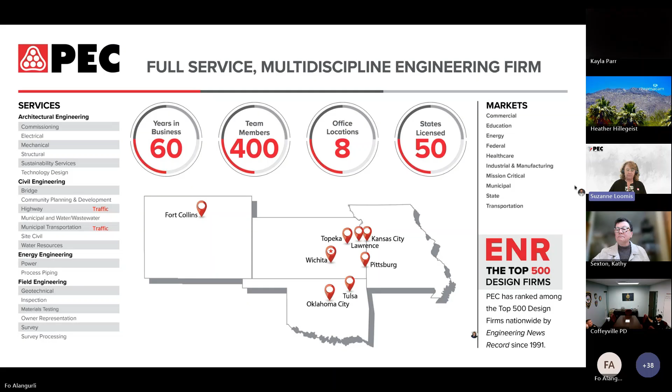Okay, thank you. We are going to be touching on just a few of the issues. We're just barely going to scrape the surface today, going through this MUTCD, and we want to make sure that you get a good flavor for what's happening with the changes, because there's an update every so often. And PEC is a multidiscipline firm, and we have offices in multiple states, and 2 of our specific groups, our highway group and our municipal transportation group, have traffic staff that are well versed in all of the traffic items that will come up in the MUTCD.

States have to update and have to accept and adopt the update to the MUTCD, and they are required to do that by January 18th of 2026. And PEC and GBA, both firms have been hired by the state of Kansas, by KDOT, and they are doing a lot of review of what the feds provided on the federal MUTCD.

And they are looking through everything, and both of these organizations provided a summary to KDOT about the updates. And this is pretty important because when you are somebody that deals with traffic control, you need to know what those changes are. There are oftentimes supplements to what the state approves as the state approved MUTCD. And when PEC and GBA look through all of the federal version, then they give a summary to KDOT and how this is going to impact things in the state.

And currently, we are on phase 2. There were a bunch of meetings. Everybody gets together and looks at what the summary was, and now they are updating KDOT standards so that they are in compliance with this new 11th edition of the MUTCD.

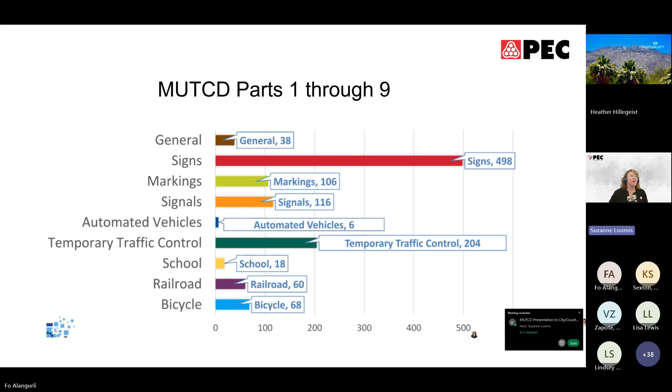There are 9 parts to the MUTCD, over 1,100 pages. And you'll notice here, these are the page numbers for each different part. And of course, when we're talking about traffic control, signs is going to have the most with 498 pages. And then temporary traffic control, which plays a huge part for anybody that is trying to make sure that the traffic control is appropriate on a roadway throughout the state and the nation.

And then the last thing that I would point out to you as a general comment, the purpose of the MUTCD is pretty specific. It is a law. There are a bunch of things that it is specific about and there are things that it is not about. So it's the law, it's the national standard, it gives technical guidance, but it is not geometric design. They are not telling you how to provide geometric design, to give countermeasures and provide strategy.

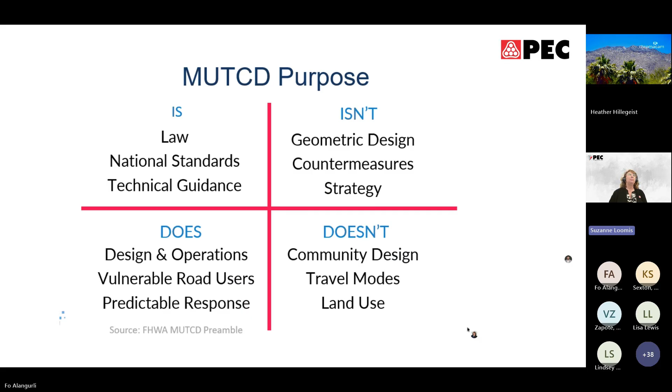You have to remember this is a document that you're going to look at to determine, hey, do I have this right? But not how to do design work specifically.

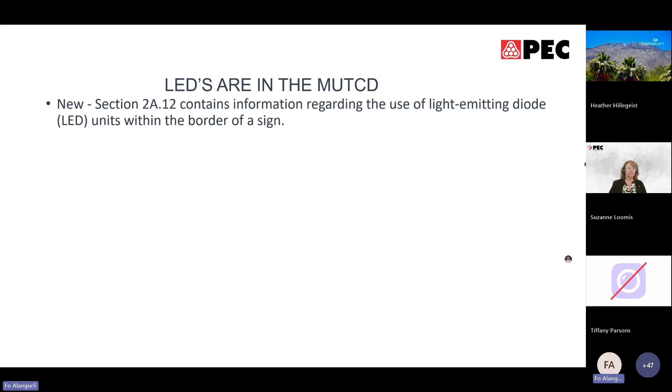So LEDs are in the MUTCD. This is something new. It was not in the older one. So there's a new section containing information regarding the use of LEDs within the border of a sign. Here's the change. The new standard: where LED units are used, the sign shall otherwise comply with the requirements for retroreflection and illumination for nighttime viewing.

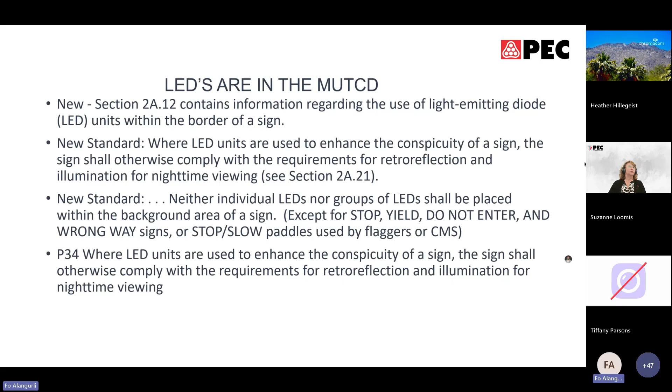And neither individual LEDs nor groups of LEDs shall be placed within the background area of a sign, except for stop, yield, do not enter, and wrong way signs. Those are the only ones that are allowed to have LEDs within the background area of the sign. And where LEDs are used, obviously the sign still shall comply with the requirements for retroreflection. So this is acceptable.

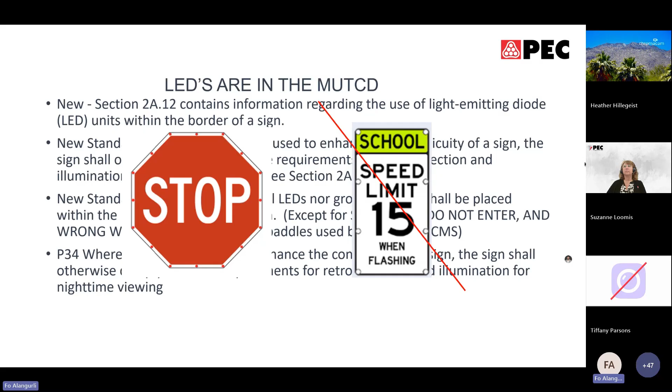This is not acceptable anymore. This is going to be a big change for quite a few cities because this was approved before, or not necessarily approved, but there wasn't anything that says you cannot do it. And now they're coming back and saying you cannot do it. So if you have any school speed limit locations with activation lights, you have to have the lights above it, and they cannot be within the border of the signs.

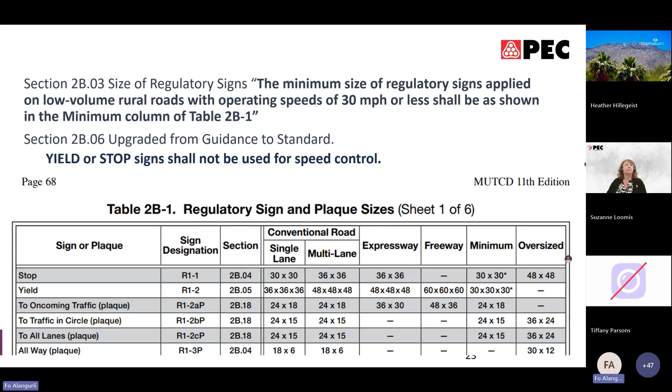At intersections where all approaches are controlled by stop signs, an all-way supplemental plaque must be mounted below each stop sign. Supplemental plaques with numbers of ways, so a two-way, a three-way, are not permitted. This is not new from the old MUTCD, but we definitely wanted to bring it up as a good reminder. So you cannot have two-way, three-way, four-way stop sign plaques anymore. It's either all-way or no plaques at all.

And yeah. I would also mention, think about whenever you have a signal that's down and then staff maybe bring out temporary stop signs and it creates a four-way stop. This applies to those temporary signs as well. So that's something to remind your staff about.

There is new guidance for all-way stop control. Section 2B-12 provides new guidance for establishing all-way stop control. Decisions should be based on an engineering study that analyzes crash experience, sight distance, volume, transitions, and other relevant factors. So this section covers a new engineering study and warrants that have to be met in order to convert your two-way stop or three-way stop to an all-way control.

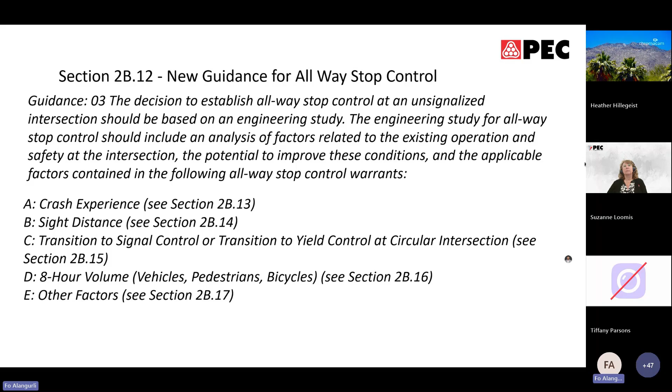2B.20, this is regarding in-street and overhead pedestrian and trail crossings. The stop for legend may only be used in states where law requires drivers to stop for pedestrians or bicyclists in a crosswalk. So correct me if I'm wrong, Suzanne, Kansas is not a state that requires a stop for pedestrians, correct? Correct. Yeah, it's a yield state. So you cannot use the sign that says state law stop for pedestrians in crosswalks. If you prefer to use one of those signs, you can only use the yield one because Kansas is not a stop for pedestrian state.

And then if you have those, pedestrian crossing signs must supplement the W11-2 warning signs with the W16-7P plaques as well.

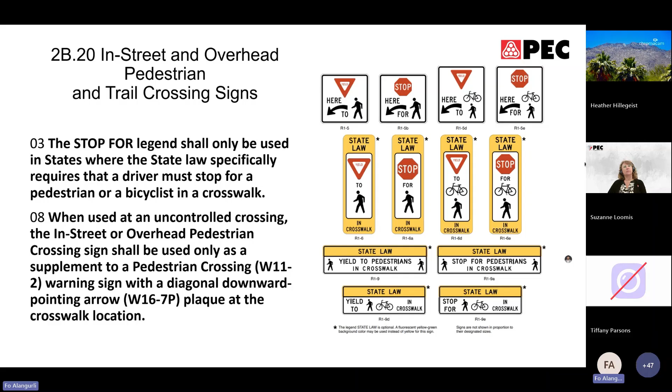Signs with roundabouts. We keep going back and forth on this. The chevron signs are going away again. They just brought it, and now they're going away. So now we have to go back to the one-way signs, and the plaque underneath it, the yellow plaque, is optional. This is frustrating for everybody because they just changed it, and now we're going back.

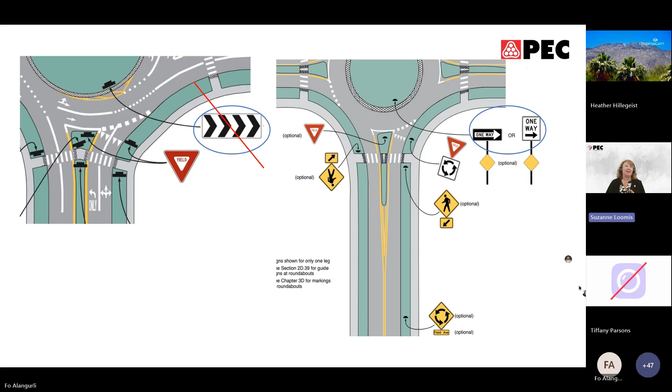Changeable message signs. Funny messages have to go. The FHWA said so. So agencies should avoid humorous, unconventional, or any messages, making sure that the information is being relayed to the driver.

All right. Part 3, markings. There is a new chapter regarding crosswalk markings. There are a few changes within the rest of the chapters, but they dedicated a whole new chapter for crosswalk markings. Section 3B.02, this one introduces warrants for yellow center lines. So there are new warrants for that. And also the no passing zones must be used on approaches to crosswalks.

There's new guidance that addresses the two-way left turn lane markings. So now anywhere that you have two-way left turn lane markings, you have to end it prior to an intersection and provide a left turn lane or bay for that left turn movement.

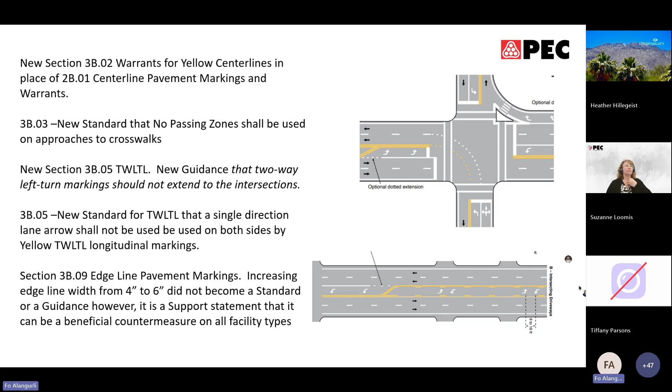And then there's also a new one for the edge line widths. Increasing edge line width from 4-inch to 6-inch did not become a standard or a guidance. This was a discussion that we were going to go to 6-inch. That did not pass. However, it is a support statement that it can be a beneficial countermeasure on all facility types. Okay.

Section 3B.07 requires normal width dotted white line markings to separate through lanes from adjacent deceleration or acceleration lanes. On major highways, it's a standard for KDOT, but the question everybody's asking MUTCD or the feds right now is, do we need it? Because the language does not say you need it at turn lanes, but the graphic is showing it. So people are asking that, and there is no answer for this right now. And we're telling everybody to keep it as is, the way that you're doing things, unless you have highways.

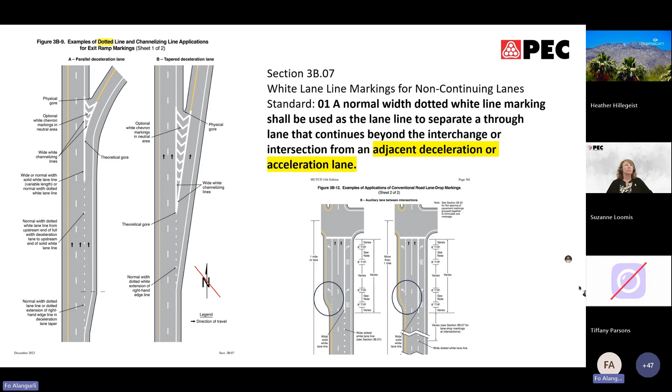Yield control intersections. New standards clarify that yield lines should not be used where drivers are required to stop, including at school and trail crossings. If a yield line is used, a yield sign must be present, and options for bicycle facilities are also included for any locations where you have bicycle facilities.

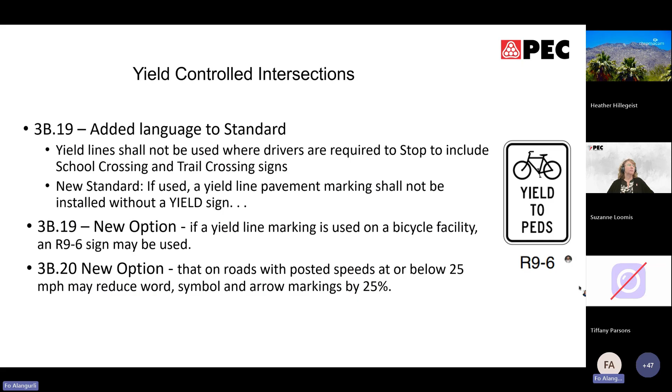There is a new option on roads with posted speeds at or below 25 miles per hour. You may reduce the word, symbol, and arrow markings by 25%.

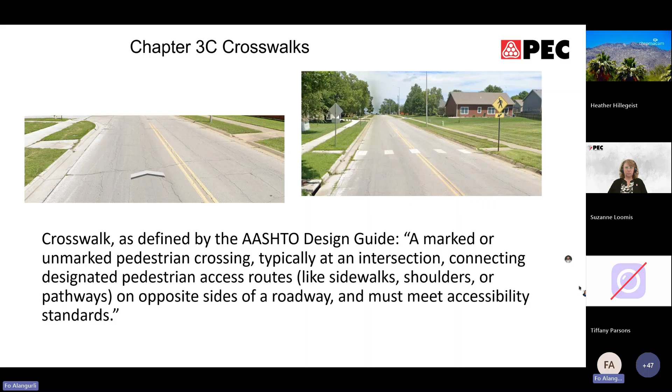Crosswalks, chapter 3C. This is the new chapter, and they have defined what a crosswalk is, and I'm just going to read it real quick. A marked or an unmarked pedestrian crossing, typically at an intersection, connecting designated pedestrian access routes like sidewalk, shoulders, pathway on opposite sides of a roadway, and must meet accessibility standards. They wanted to make sure that has been established for the definition for a crosswalk.

Fo, I might jump in. There's been a question, and I think this will apply as we're talking through other new items. A question about, on the existing roundabouts where you have chevrons, are you required to change those out right now? The answer to that is no, not right now. But if you make a change to anything, if say a sign was hit by somebody, you need to change it at that time as you're doing maintenance.

And this applies on the crosswalks and things, because pavement markings you're typically updating every year. So when you put your new down, you need to put down the new MUTCD standard. And when you change out signs, you need to change them out with new. If there's an accident at that location, then when you put up new, you ought to put up the new MUTCD requirements. Yep.

Crosswalks and traffic signals. There's new guidance that recommends installing crosswalk markings at locations controlled by traffic signals. The engineering judgment statement is now an option for omitting crosswalks. Also, the minimum width for marked crosswalks is 6 feet, and 8 feet for non-intersection crosswalks, so any mid-block crosswalks with speed limits of 40 miles per hour or greater.

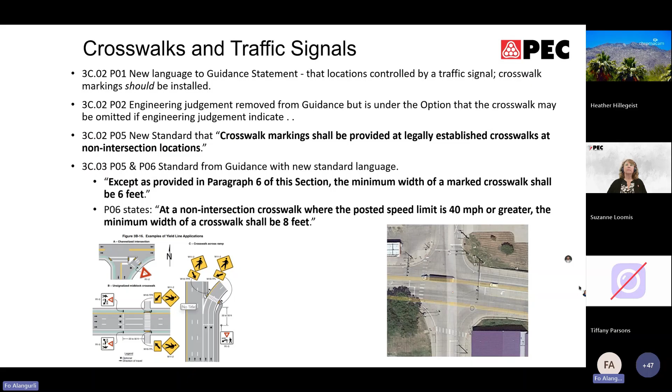More crosswalks. There are new standards requiring curb ramps to be within the extension of crosswalk markings, which typically everybody does, but they wanted to make sure that's included. High visibility crosswalk pavement markings are to be used at mid-block crossings. Transverse pavement markings cannot be used at mid-block crossings. You can only use them at stop-controlled or signalized intersections.

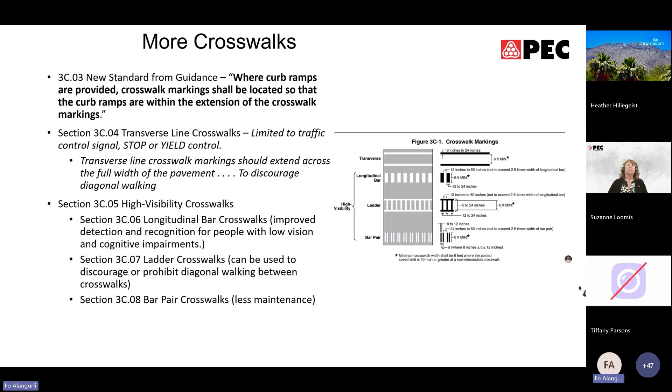Section 3H.06 limits the green colored pavement to specific bicycle facilities, such as bike lanes, extensions through intersections, two-stage turn boxes, and as a background for bicycle detector symbols.

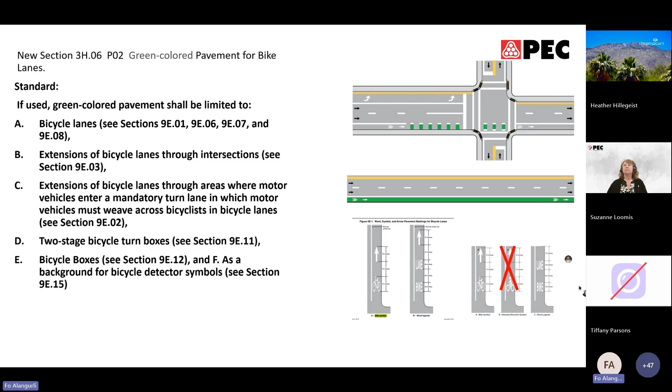They also have removed the helmeted bicyclist pavement marking symbol that was in the previous one. So now you can only use either the bike lane with an arrow or the bicycle with an arrow. So that's a big change. I know in Lawrence, they use the helmeted one everywhere, and now on any new project they have to use the new symbols.

Part 4, highway traffic signals. All right. Signal warrants are now guidance rather than standards. This change is because they wanted engineering judgment to be used in conjunction with the warrants to determine the need for traffic signals. It benefits quite a few locations that do not meet all the warrants for a signal, yet it is beneficial to install a signal. So now they're adding the engineering judgment side to be able to install those signals.

And then review the new standards in Chapter 4C for details. Chapter 4C has all the details regarding that.

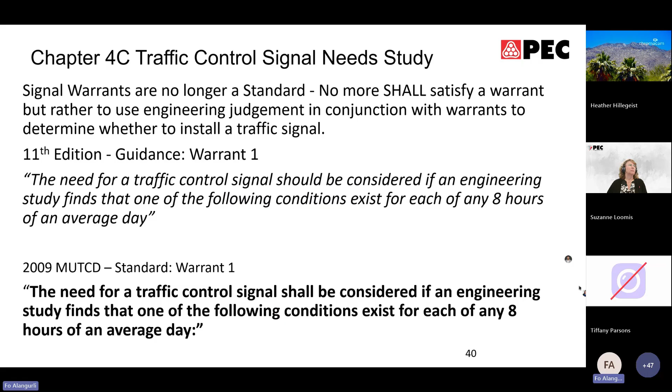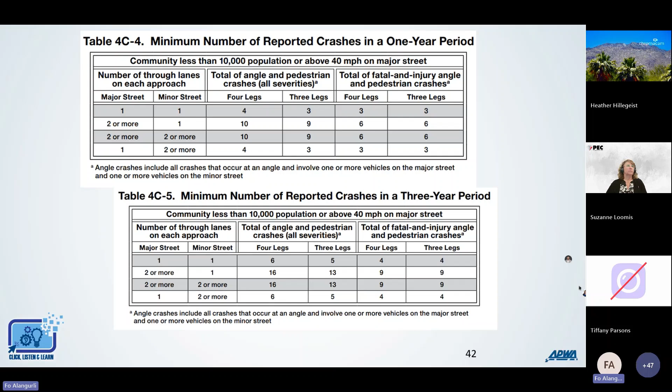All right, warrant 7. This warrant 7, for crash experience, now includes 4 new tables. They also added language that agencies can calibrate the Highway Safety Manual safety performance functions to their own crash data, improving the local relevance. But there are 4 new tables for the minimum crashes for warrant 7, and those tables are 4C-2 through 4C-5.

All right. Chapter 4D, section 4D.01, introduces new guidance for covering traffic signal faces with the yellow retroreflective strips. If the cover is placed, it should cover the entire signal face and the back plate. You cannot only cover the signal heads. So the whole signal head has to be covered.

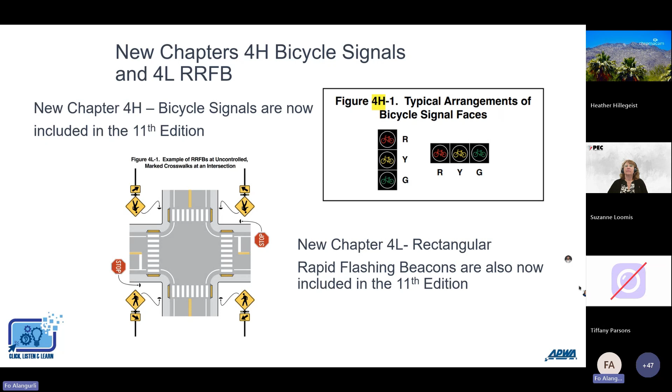New chapter 4H, bicycle signals, and 4L regarding the RRFB. So these chapters address the bicycle signals and the rectangular rapid flashing beacons. These devices are now included in the MUTCD because they're becoming a lot more popular. So they included them in the MUTCD, and there are some graphics in those chapters as well.

There is a new section regarding bicycle push buttons. It sets the standards for bicycle push buttons. They must meet the accessibility requirements and be accompanied by appropriate signs explaining their purpose and operation. And there are new signs regarding bicycle facilities too.

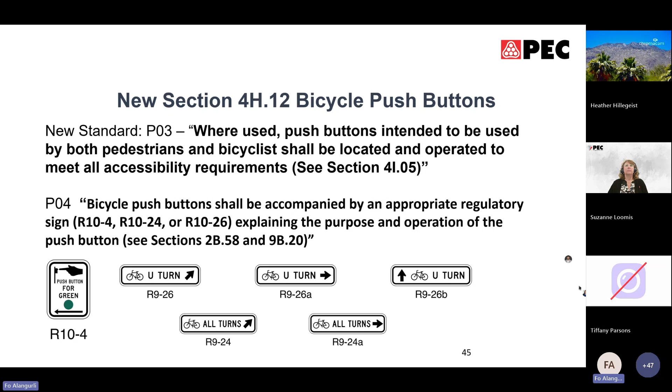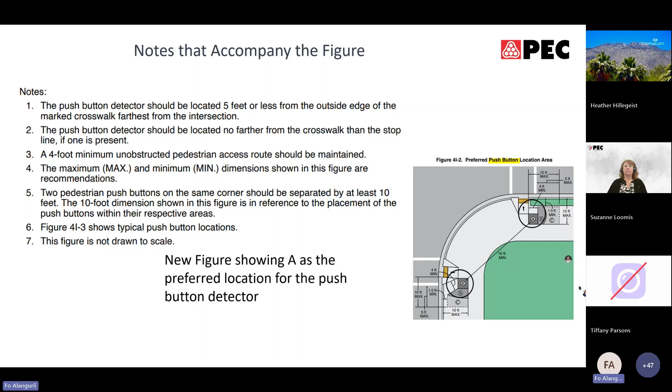There are new figures showing the preferred location for the push button detectors, and there are notes. So I'm not going to go into details, but this new section covers it. It's in section 4I. It covers all the new standards for where to place the push buttons for bicycles and pedestrians as well.

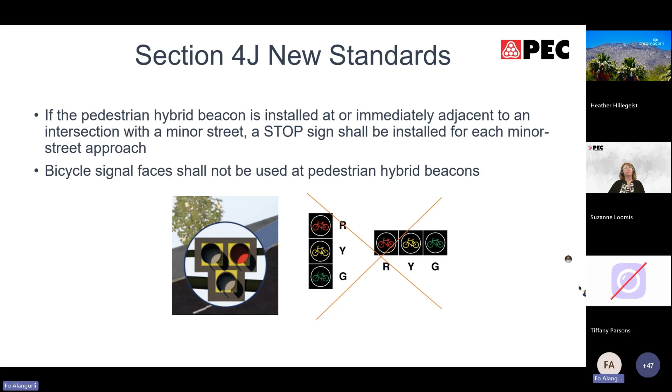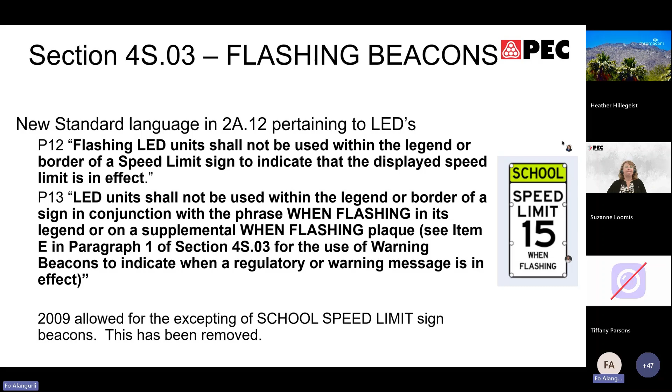Section 4S.03 introduces new standards for flashing LED units. As we talked about, they cannot be used within the legend or border of a speed limit sign. And the previous exception for school speed limit sign beacons, which existed in the 2009 edition, has been removed. With that, I'll turn it over to Suzanne for Part 5.

Okay, Part 5 is about traffic control devices for automated vehicles. The key here is that this is not a required section, but it's going to give you some guidance. And this is especially important if you want these automated vehicles to operate well in your community and you have them in your community. Probably all of us have a vehicle that is utilizing some type of guidance. I'll let you read through these later.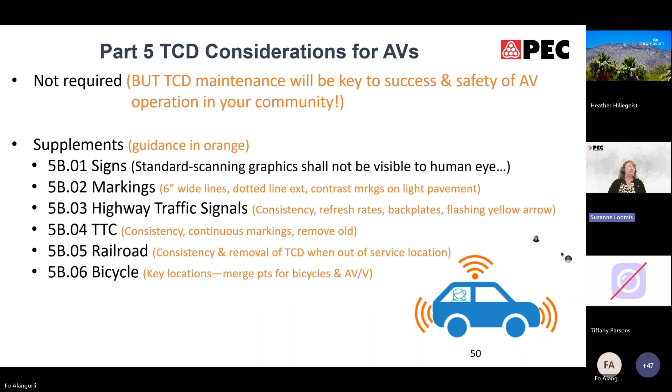We want to pick up the pace here. They tried to put down 6-inch wide lines, because these vehicles are following the traffic control, the pavement markings. So you want to make sure that they can see everything. They want to keep the driver safe. And the key to all of this is uniformity. Every part talks about uniformity of the markings, the signals, the traffic control. This takes us back to our college days, when they told us do not violate the driver's expectancy. So make everything uniform, and that's coming into play with all of these AVs.

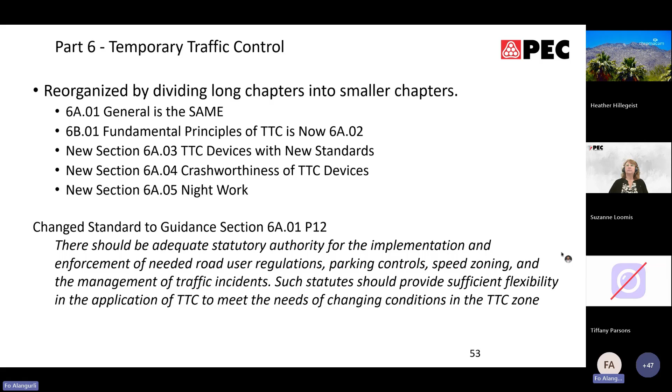All right, we'll jump into Part 6, temporary traffic control. This is a big one. There aren't a lot of changes, but a lot of new information has been added. The chapters have been divided for clarity, so there are new chapters. New standards address traffic control devices, crashworthiness, and night work. And guidance statements have been revised for ADA compliance.

Part 6, general. There's new language emphasizing providing information in usable formats for pedestrians with vision disabilities. Temporary traffic control devices are defined broadly, and sidewalk closure guidance has been revised for ADA compliance. This is a big one. You have to provide it during traffic control while you're closing those sidewalks.

You have to provide the vocal... I can't remember, what is it called, Suzanne? It's skipping me right now. Audible? The audible, yep, here we go. The audible information, the audible message devices on those sidewalk traffic control signs while you're closing those sidewalks, you have to provide that. This is a big one, I believe. There's been talk about it, so this is a big change. Make sure that you're aware of it, and that is section 6A.

Guidance now limits flag use to emergencies. Flags must be red or fluorescent orange-red, at least 24 inches square, and securely fastened. AFADs also must be operated by a flagger within line of sight. That's another change too. They added new late merge signing. This is becoming more popular. Late merge operations are now introduced with new signs and guidance. And the term private road is replaced by site roadway.

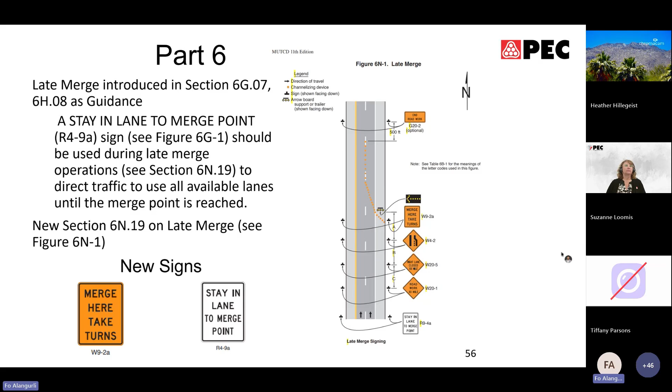Section 6M, this is regarding the positive protection and temporary traffic barriers. There is new guidance that recommends considering longitudinal traffic barriers and positive protection devices in work zones where workers are at increased risk. There are new standards requiring the sidewalk detour or diversion signs to include audible information devices. This is to improve the accessibility for all users.

Yeah, and this is for figure 6B-29. Eight new typical applications have been added, including 5 for bicycles and 3 for roundabouts too. And these examples definitely are helpful to have set standards for agencies. So, part 7. Okay, part 7. So this is school traffic areas.

Part 8, traffic control for railroad. The biggest change in this one, and I think we only have like 2 or 3 slides on this, but the biggest change to part 8 is the importance of the diagnostic team. They have really emphasized the diagnostic team in the new changes, making sure that anytime you are making any changes or doing any work around the railroad, you have to include a diagnostic team. This is a big change, I know, for everybody, and unfortunately we have to deal with the railroad, and it's never fun to do that.

Yeah. So section 8C02, this is regarding the grade crossing pavement markings. They must be placed in each approach lane. So anytime you have the RXR pavement markings, you have to have it for each approach lane. And also the lane use arrow markings must not be placed between the stop line and the tracks. In that envelope area between your stop bar and your tracks, you cannot have any turn lane pavement markings. And this is for safety, making sure that people do not turn into the railroad. And I'm guessing somebody somewhere in the United States did it, and now it's a standard. So

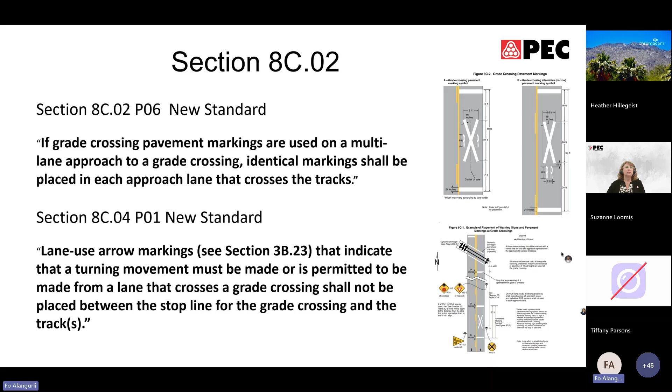New guidance. This is section 8C05. There is new guidance regarding the edge lines, lane lines, and center lines. They now should extend up to and across grade crossings. A lot of cities or locations stop their pavement markings within that envelope area to avoid having to deal with the railroad and getting their approval in order to do the pavement markings. But now you have to go across the railroad crossing. And another thing is, at least one pair of flashing lights should be provided for each approach lane. So if you have multiple approach lanes, you have to have multiple flashing lights, one per lane.

A stop or yield sign must not be installed in conjunction with a bicycle signal face. And this is being covered in chapter 4H as well. So it's being referenced in 2 locations. And mainly this is to make sure of the clarity and the safety for all users, and there's no confusion.

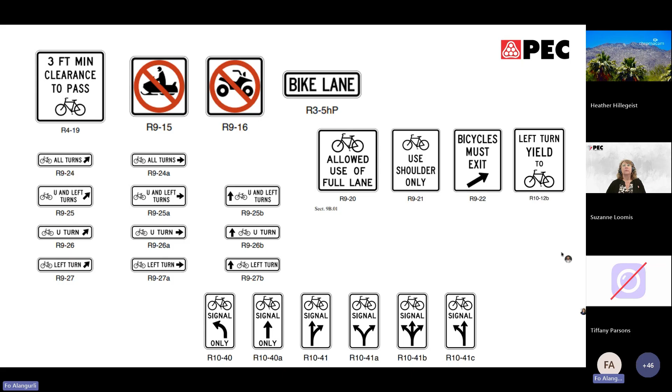The slides just show visuals of the new bicycle facility signs and their use. And anytime you have any of those bicycle facilities, you definitely have a lot more options now to use a new set of signs for that. These are just a few of the new signs related to the bicycle facilities.

The R3-5hP, and the bicycles are allowed to use the full lane. This is a new sign as well, and there's been a lot of changes regarding all those bicycle facilities, and this is just a reaction to that, adding quite a bit of new signs to it. So, another set of new signs for all your bicycle facilities.